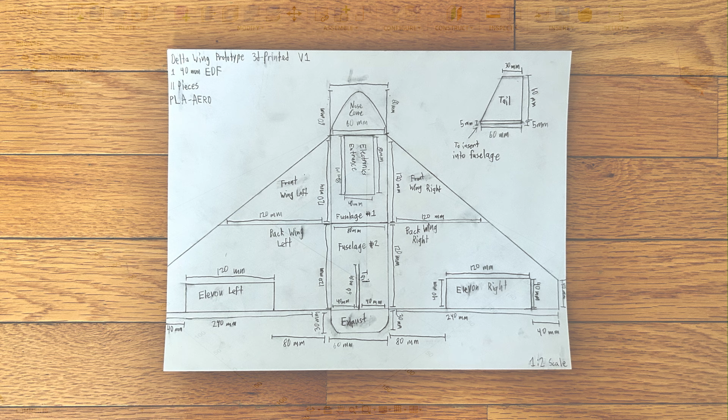I first started by drawing a half-scale top-down diagram of the aircraft on paper. I then made a rough draft prototype of the sketch in Fusion 360 using basic methods such as extrusion, filleting, and shelling. From there, I printed a 1:2 scale model out of regular PLA that would serve as a benchmark. After splitting the CAD model into separate pieces to fit on the build plate, I went ahead and created the second prototype, this time a full-scale model out of the same filament.

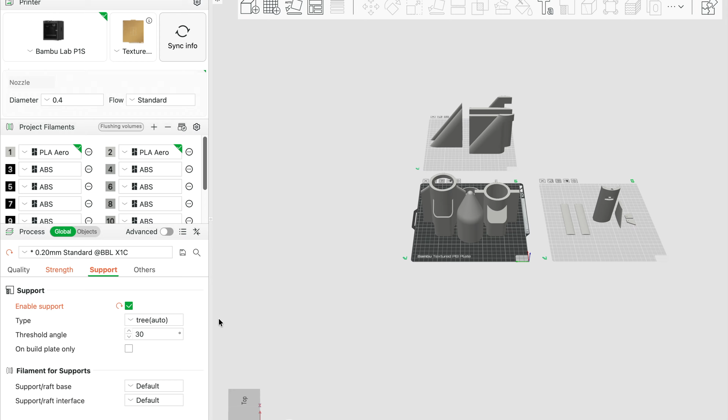Now in the Bambu Lab Slicer app, I'll be printing with PLA aero to save on weight. In addition, to provide maximum strength without being too heavy, all parts will be 2 walls with 3% gyroid infill. I decided to print the plane across 3 plates, separating the body, wings, and electronics hatch/control surfaces. In total, the entire plane, excluding the supports, weighs 206.2 grams and takes 17 hours and 25 minutes to print. Next, I will show you the assembly process of Delta V1.

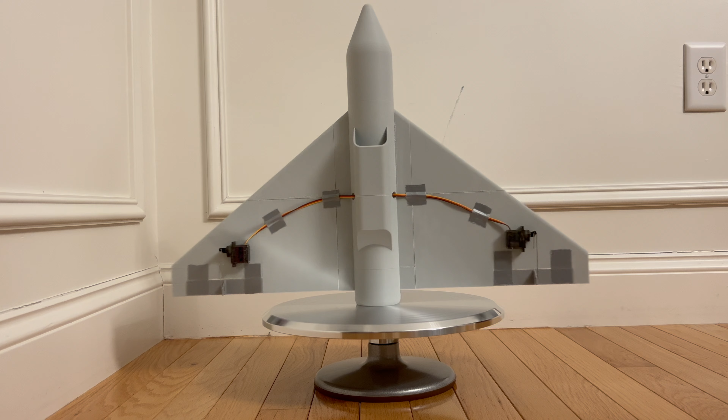Unfortunately, I made the mistake of assuming that I could simply mount the EDF backwards, like a pusher prop, and that it would generate the same amount of thrust as when installed forwards. After conducting a control surface test and doing some research, I found out that I would have to entirely redesign the motor mount to achieve maximum power. This meant, however, that I would have to break apart the current version to retrieve the electronics.

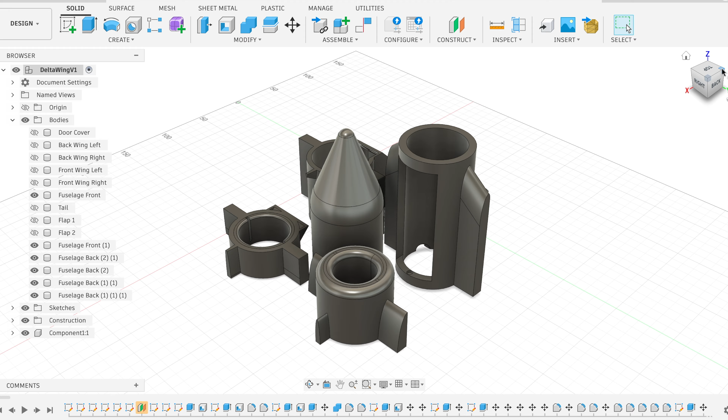After mourning, I quickly got back to work in Fusion 360, designing a properly facing mount for the EDF. Luckily, the revision only affected the aircraft's fuselage, and I was able to print the other parts as normal. 20 hours of CAD design, multiple failed prints, and an aerodynamically incorrect motor mount later, Delta V1 is now complete. I'm super proud of how the aircraft turned out, especially considering that this was my first big 3D printed design project. Let me take you on a quick tour of the RC plane.

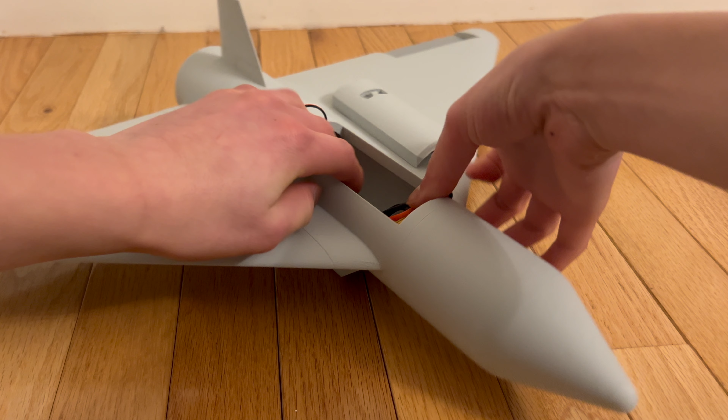First, the front of the fuselage, which houses a 1300 mAh 4S battery that provides a maximum flight time of around 3 minutes. The power cell connects to a 40 amp electronic speed controller, which I chose over lighter and more compact ESCs to prevent overheating and electronic failures. The control surfaces are all hooked up to a standard 6-channel receiver, which is more than enough, as the aircraft only uses 3 channels. To keep the parts from shifting in flight, there are Velcro strips and a magnetic door to keep everything in place.

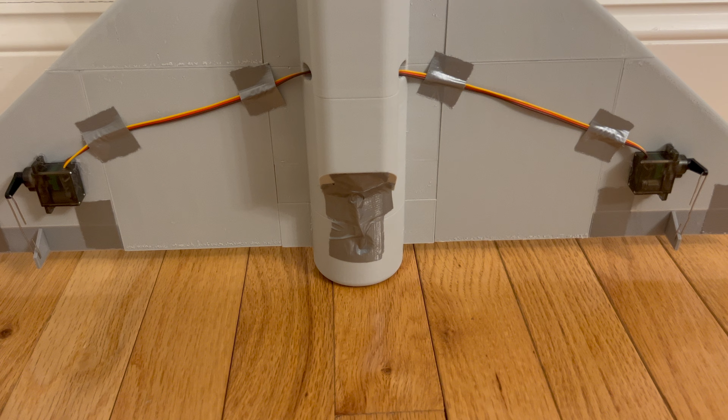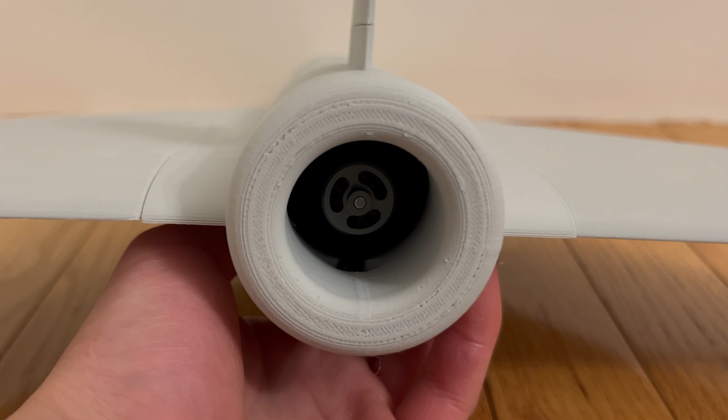Second, the wings, connected to which are 2 metal gear 9-gram servos, which I selected over plastic ones for their superior strength and durability. Lastly, the housing for the 40mm EDF, for which I designed a thrust tube that tapers down to 80% of the fan-swept area, directing thrust more efficiently while in the air.

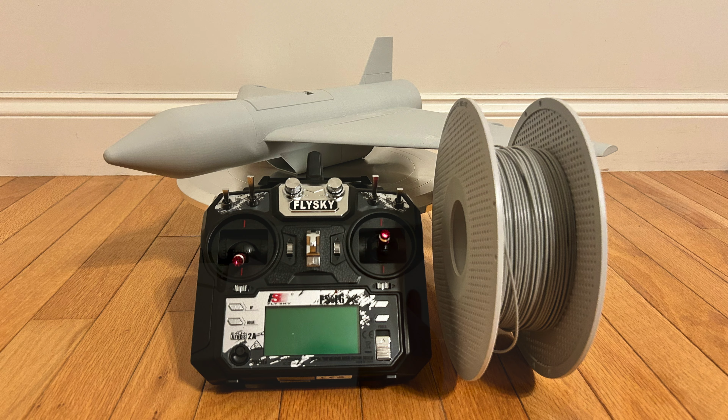In total, the aircraft weighs 510 grams, giving it a thrust-to-weight ratio of 0.98 to 1, providing plenty of power. The center of gravity is about 25% back on the mean aerodynamic wing chord, considered the sweet spot for balanced flight. Well, there you have it. The initial phase of designing and building Delta V1 is finished. Stay tuned for part 2, where I will put my RC piloting skills to the test during the maiden flight.